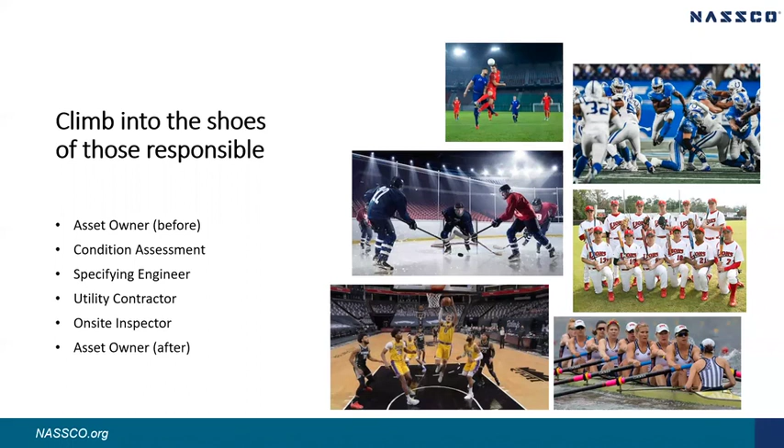And to tell this condensed story, we elected to present it in two one-hour presentations, today and tomorrow at the same time. In sequential order, today we will hear from the owner, then the condition assessment engineer, and then the specifying engineer. That's just half the story, followed by tomorrow's utility contractor, on-site inspection, and owner's beliefs on winning a manhole rehab program.

Before I introduce our asset owner, I'd like to engage first in the very first poll question, which is an opportunity for us to be interactive with each other. And the first poll question, please present. It takes a moment sometimes for these to appear. First poll question: in your community, who is responsible for initiating manhole rehab projects? Single answer, please, your best answer.

Sheila probably has a view of how these are compiling, and this first poll question is a tough one. It may be multiple choices on there. Sheila, do you have any responses to share? They're still calculating, Don, still getting a few coming in, so we'll just give it another second. Okay. You got it. We have three poll questions planned for each day. They're kind of fun.

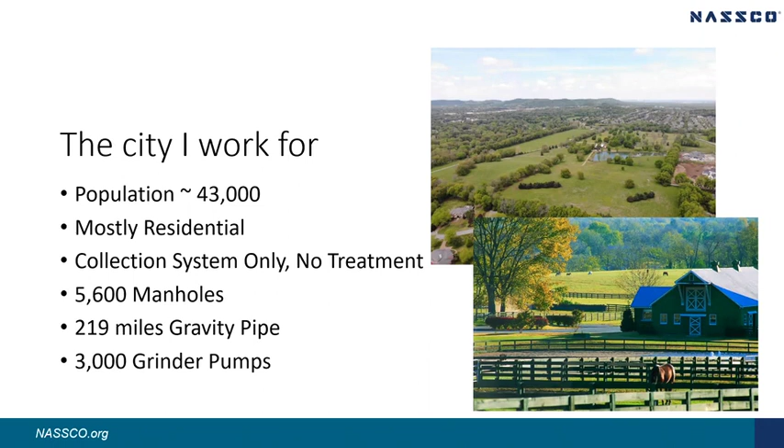And how that relates to what we're talking about today and tomorrow, and how we had to take that into consideration through our manhole rehabilitation program, is those can produce high levels of hydrogen sulfide, which, as we all know, can attack your concrete substrates and your cast iron castings.

So to walk you through Brentwood and what we've had to experience and what I've had to experience as an owner: in the mid to late 90s, Brentwood was doing some rehab efforts. They knew they had some issues. It was all kind of self-imposed. They had purchased some equipment, did some CCTV inspections of pipelines, smoke testing. The main rehab method was clay and concrete joint repairs and grout injections.

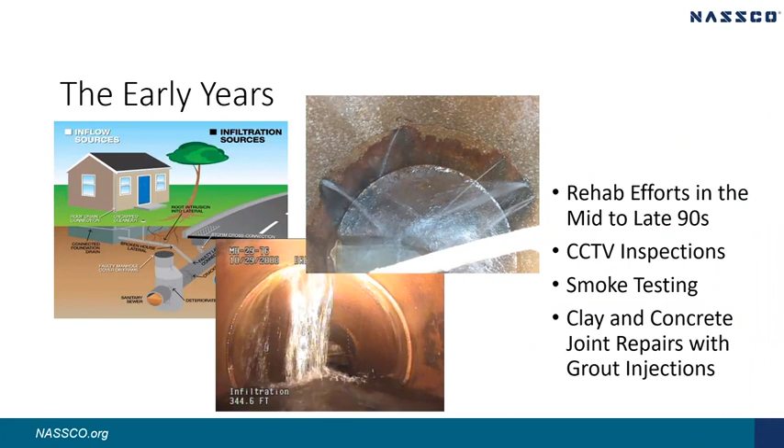And what you don't see on this slide is any mention of manhole rehabilitation. It just didn't occur. They would make repairs as needed to manholes for almost a complete failure or something, but there was no manhole-specific inspection and no manhole rehab at that time.

So that led us into 2006, which is when the red flags got waved around us. Our I&I issues had reached a point that checking a box off for our internal rehab program wasn't enough. And so unfortunately, the Tennessee Department of Environment and Conservation, TDEC, stepped in and we were issued an agreed order. As part of that, we went into a sewer moratorium, which meant no new connections to our collection system. And as any growing city, especially in the mid 2000s, that was a major concern.

And just to give you a point of reference, in 2004, what triggered some of this and caught the attention of the regulatory agencies was we had 30 reported sanitary sewer overflow events.

So after we had received the order, the next step as an owner was to try and come up with a plan of action. And so a CAP, corrective action plan, and engineering reports were created. It was split up into two phases. Obviously, a sewer rehab program was generated, and as part of that program, manhole rehabilitation was an important aspect. EQ tanks were also identified in those early studies. And the timeline presented to the regulatory agency, TDEC, was to be done with our initial efforts in 2015. Going back to our budget requirements, it was estimated at $30 million at that time.

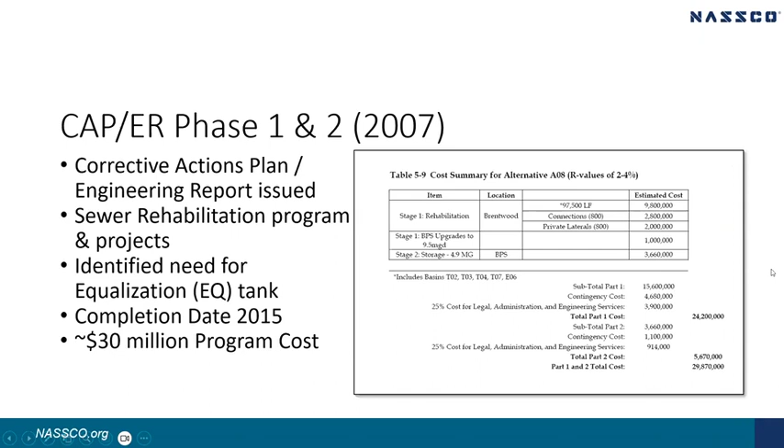Brentwood, our department, was in a good position financially, and how we handled the budget and how that dictated how we rolled out our manhole rehabilitation construction project was that money was funded through bonds, so we were not dependent on any outside funding sources.

So in 2008, we began our sewer rehab program, if you will, which included manhole rehabilitation. I'm going to walk through some of those steps and some takeaways from that. Again, 2008 to the end of 2014, bringing us to 2015, was our rehab program. I'm going to talk in some more detail here about flow monitoring with I&I analysis and studies, and then also some program management and construction oversight.

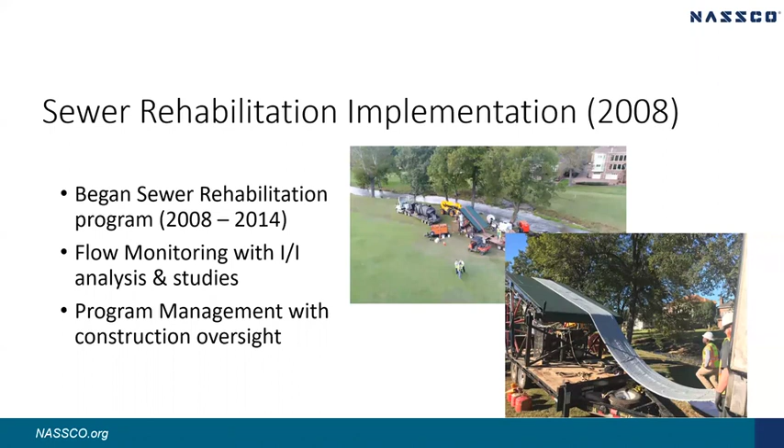So one thing I do want to mention is that as we got into our program, we were fortunate enough that the city decided early on to create a GIS department in 2006, as we were getting into our order and our program. And I would imagine today most communities, municipalities, utility districts have a GIS system of some sort and have GPS'd their assets, particularly as it relates to manhole rehabilitation. This has been a critical component of our program and of managing our manhole rehabilitation projects.

Obviously, going out, locating them, finding them, if they're buried, knowing where they are, using old as-builts to kind of determine when they were built, type of materials that they were created from. It's a huge thing. But more importantly, as you jump 10, 15 years later, after you've gone through a manhole rehabilitation program, it's so critical to be able to store all that data that you collect during that process.

And one of the things today that we're fortunate of is I can click on a manhole in our GIS system and I can see when it was rehabbed, who rehabbed it, what contractor it was, what products they used, and some additional information. So that's just good as you continue on with your program, as you expand your program, and then maybe as you revisit areas that you've completed in years down the road, being able to map that out and manage all that data.

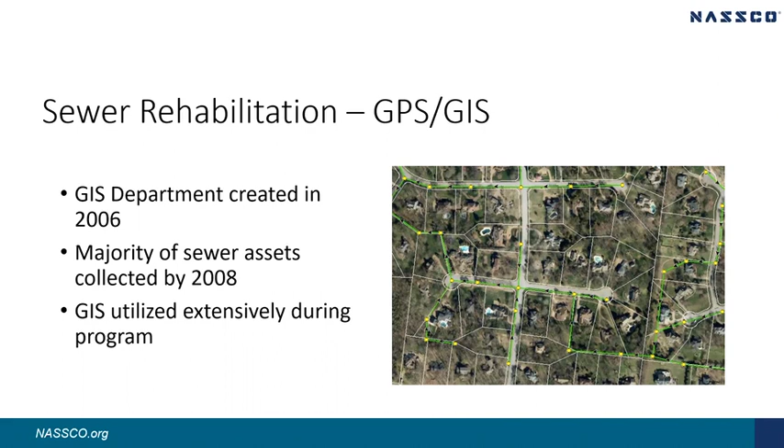So I just want to briefly mention flow monitoring. While it's not directly manhole rehabilitation related, it is, in my opinion, a key component of rating or showing your success for a manhole rehabilitation project or program. We began flow monitoring with 6 permanent meter sites back in 2006. We still have those in the ground today. That's kind of what I like to say: it gives us a pulse of our system and how it's reacting annually.

And also over the years, we've done temporary metering up to 50 sites throughout the city, breaking it down into sub-meter basins. And this has been critical. It's important to have a baseline of what you're trying to achieve, whether it's an overall sewer rehab program, but then also manhole rehabilitation projects. Have that baseline, look to see how well you've done. Are you spending your money wisely? Is that manhole project that you did in that basin, did it achieve what you wanted to? And then down the road, 10, 15 years, those products that you used, are they holding up?

So it also helps with regulatory compliance. We were able to use flow monitoring analysis throughout our rehab to be able to get out of a moratorium, or I guess a moratorium relief. And so that's another benefit of flow monitoring.

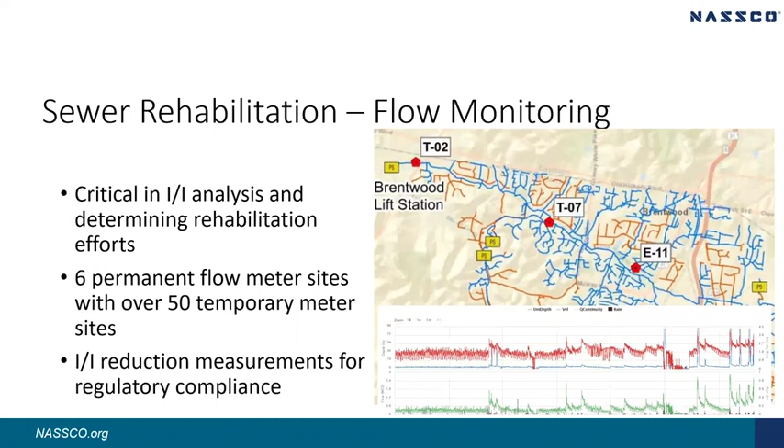So sewer rehab and kind of our construction methods for our project. We kind of went about it with the find and fix method, if you will. With the fact that we were using money in-house, we were able to hire on contractors. We sent them out to sub-basins. They did CCTV inspection, manhole inspections. And then from that, they gave it to our engineers. Our engineers in return gave those contractors task orders to complete the work so that we can streamline it and get our rehabilitation efforts in a faster method.

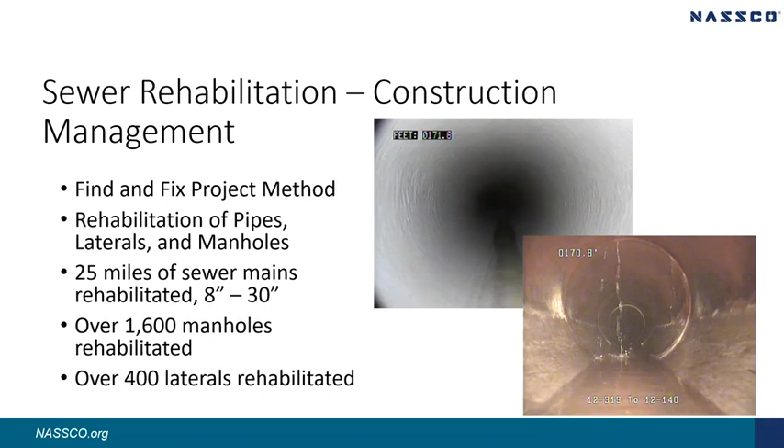So as we neared the end of our initial program, we decided to continue on and basically created a phase 3 program and do some more rehab. We saw the effectiveness that manhole rehab was having on our system. The leaks that we found in our manholes were great, and by reducing that, we were seeing a benefit in our reduction in flows. And so we decided to continue on through 2019 with our rehab program. And at that point, we had spent almost 24 million, and 20% of our sewer system had been rehabbed.

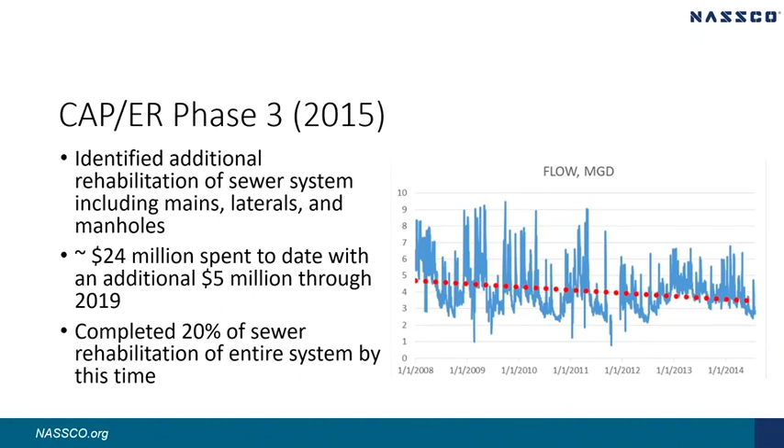I want to briefly mention too, in 2015, a master plan was done in conjunction with that CAP-ER. And one of the benefits that came out of that I just want to talk about briefly was the hydraulic model. And this kind of goes hand in hand with the flow monitoring. A lot of times you're talking manhole rehab and the money you spent for that. But again, it's also good to acknowledge and look into spending some money on other sources such as flow monitoring and hydraulic model to be able to help you recognize areas that maybe you need to go into and look at rehab and doing some manhole rehab.

It also helps with regulatory agencies and showing them your results of all the work that you're doing and the money you're spending as it relates to manhole rehab and then sewer rehab in general. But again, a hydraulic model, we went through this process and it continues to serve as a great tool both during construction, after construction, and as we continue to project and look into future rehab efforts.

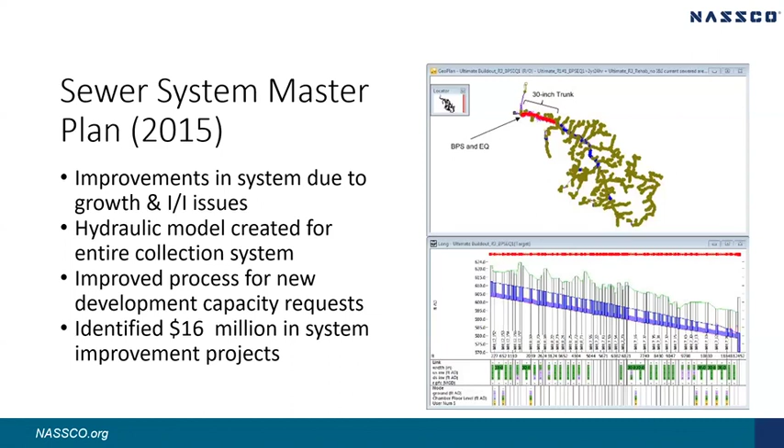And so in 2019, we kind of came to the end of our phase 3. And once again, we worked with our regulatory agency, TDEC, and we asked for another extension to continue to work at our I&I removal. We had some great results, and I'll touch on the results of everything at the end of today's program. But it was successful, so we decided to continue on with rehab through 2022. Part of that and what was in the initial plan was to build an EQ tank, and that is online as of December of 2022.

But more importantly, and as it relates to this webinar, our sewer rehabilitation program is planned to continue through 2027, which we will allocate through continued funding. Here to date, we've just finished a number of smoke testing. We've kind of gone back into smoke testing through manholes, but then also we just finished a 200+ manhole inspection with an outside contractor along our main trunk line that runs along the river. And our engineers are currently collecting that data, going through it, and we plan to put out a pretty significant project for manhole rehabilitation here in the next year.

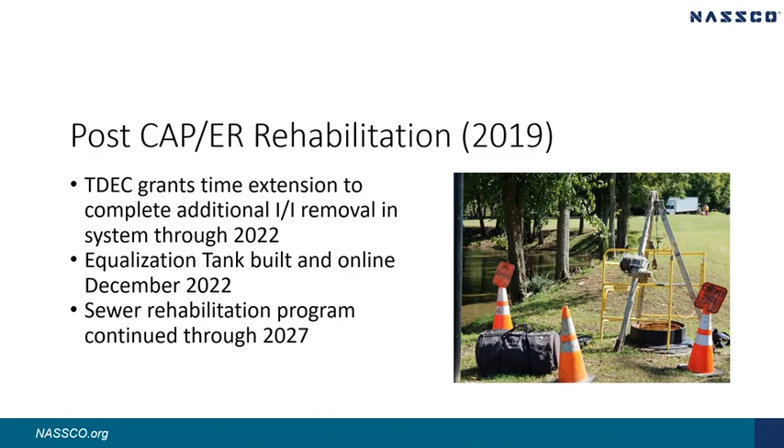So kind of in summary, as an owner in controlling our assets and manhole rehabilitation, budget concerns always come into play. We'll talk about inspections and providing that oversight during construction, manhole rehab, and how important that is, and being able to budget for that and fund those services. Obviously, regulatory guidance and enforcement is an important component for an owner having to work through their timelines and the guidance and regulations that they want to see from a manhole rehab or sewer rehab program.

GIS asset management is a critical component for particularly manhole rehab, in my opinion, and being able to manage that. You can get inundated very quickly as you get into a project or program with manholes and what you've done, what you haven't done, who did it and when they did it and all that. So again, a critical component and worth taking the time to get that right on the front end.

Flow monitoring, again, in my opinion, is a great tool to be able to identify areas to spend your money where you might get your best bang for your buck in manhole rehab, and then also being able to show those results that what you're doing is working, and maybe it's not. Maybe you need to reassess your efforts and your methods. Obviously, construction methods will come into play with some of the other presentations. But the main goal for everybody here on today's webinar is I think we're all in it to see the reduction of I&I and ultimately elimination of sanitary sewer overflows for our communities, municipalities, and utility districts throughout the nation.

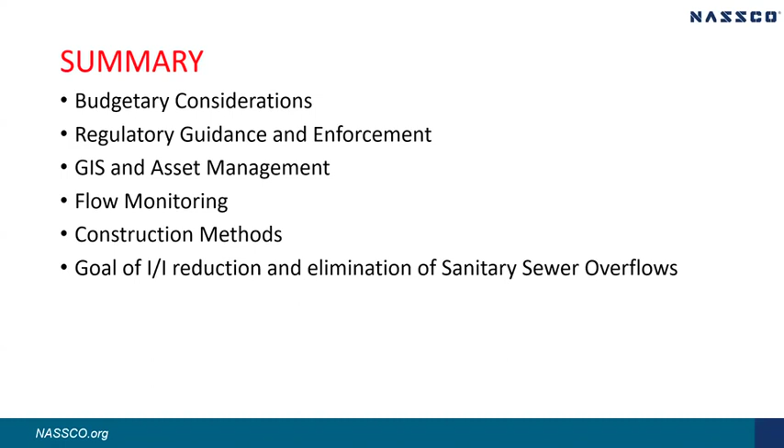And before we move on to our next engineer on condition assessment, the next poll question is a simple true or false answer. The question is, level 1 condition assessment does not require man entry into the structure and can be conducted from the surface opening. True or false? Level 1 condition assessment does not require man entry into the structure and can be conducted from the surface opening.

These questions are always interesting to me. And it looks like we got a response coming. Yes. It appears the majority of you know a bit about condition assessment on manholes. The answer is true. Level 1 assessment can and is conducted with a top-down view from the surface. Thank you.

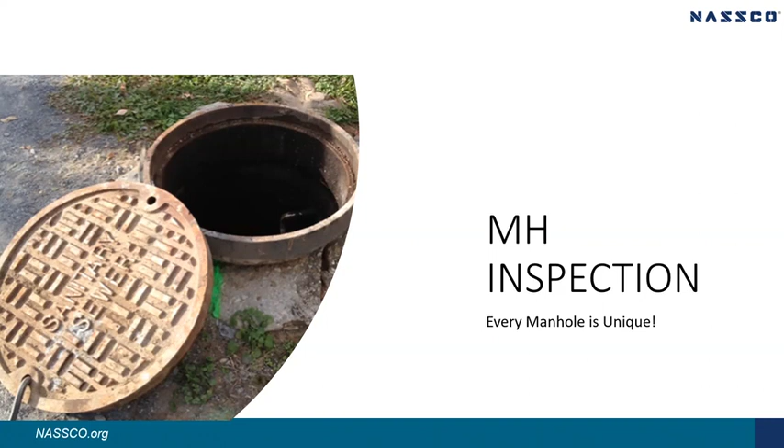And I want to convince you that both are important and that manholes in particular are unique and they are actually rather complicated. So what makes a manhole unique? Well, think about it. You have a hole there that you want to allow people to come into to inspect the manhole and do maintenance on the sewers, but you also want to keep people out. You want to allow cameras and cleaning equipment to get in there, but you want to keep runoff out of the manhole.

You have a vertical situation. We're going to talk later about the manhole being considered a vertical pipe that starts at the surface, so it gets runoff coming into it from inflow, from rainfall directly. But if it gets deep enough, it gets below the groundwater table and you've got infiltration coming in. It's also subject to hydrogen sulfide corrosion. So there are a lot of things it needs to maintain itself through, but also allow. So it is a very unique structure.

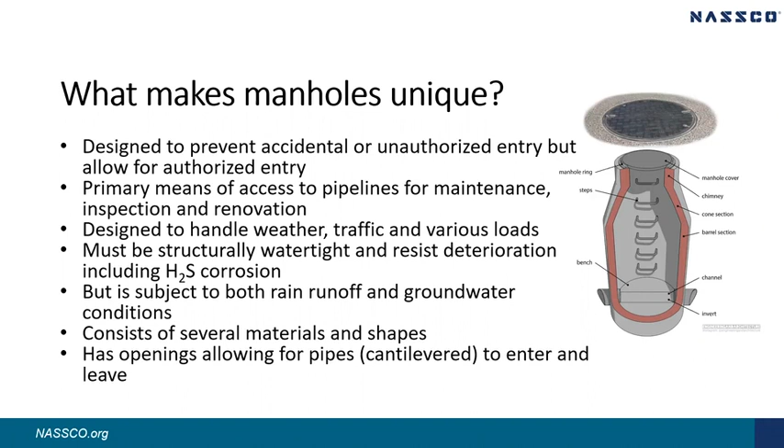Don mentioned that I was actually on the board of directors of the Buried Asset Management Institute. Some of you know Tom Iseley and his group. That group is really dedicated to the asset management side of things, so I have that hat I frequently put on. I don't know if BAMI actually developed these, but I know they use these questions. There are 8 basic questions of asset management that are going to be associated with manhole condition assessment.

The first 3 questions answer these. What do we have? And don't necessarily think that you know what you have. I've seen many times that a utility is surprised, when a complete condition assessment is done, at how many manholes they actually have in their system. And then where are these manholes located? You're going to get that information also from condition assessment. And more pertinent to today's discussion, we're going to find out what the condition of each manhole is.

You're going to be able to determine through a level 1 or a level 2 inspection what the condition of the manhole is. So condition assessment gets those first 3 questions answered, but you still have more information you can glean once you've done a condition assessment and located the manholes. From the condition assessment, you can determine what the manhole is worth, based upon its original construction, what type of construction, how long it's been in the ground, how much useful life it has, and what its condition is.

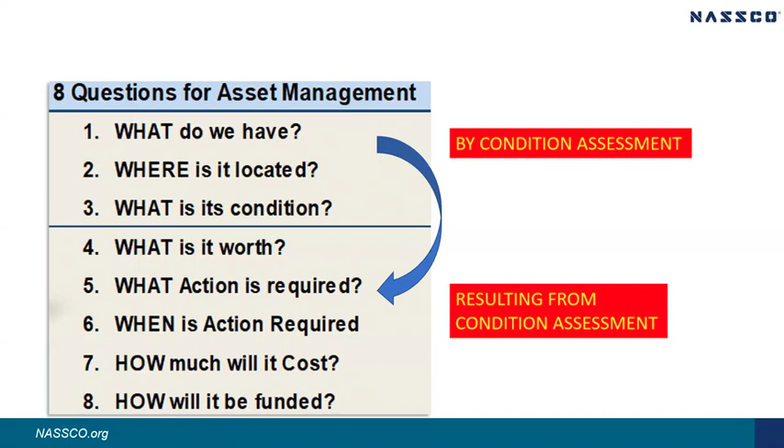Then you can determine what action is required, perhaps maintenance, perhaps a rehabilitation, perhaps a replacement, for each of those manholes you've inspected. Then through risk management you can establish a priority, and that priority and your budget will establish when the action is going to be required. We're going to talk about how we set some policy for doing that. And then what's it going to cost to get that manhole back in the condition you want to maintain it in? And finally, once you know your cost and your action plan, how it's going to be funded and what funding sources to look for.

We've already hinted at this, but there are two basic types of manhole inspection. This was in the poll question. As most of you understood, a level 1 inspection is what the old timers used to call an above ground physical inspection. You'd have a pad, maybe make a few measurements, look into that manhole and determine: is the frame in good condition? Is the frame seal leaking? Is the chimney in good condition, the cone and the wall? And you do all of that from above ground. You can get quite a few of these done in a day, maybe 40 or 50.

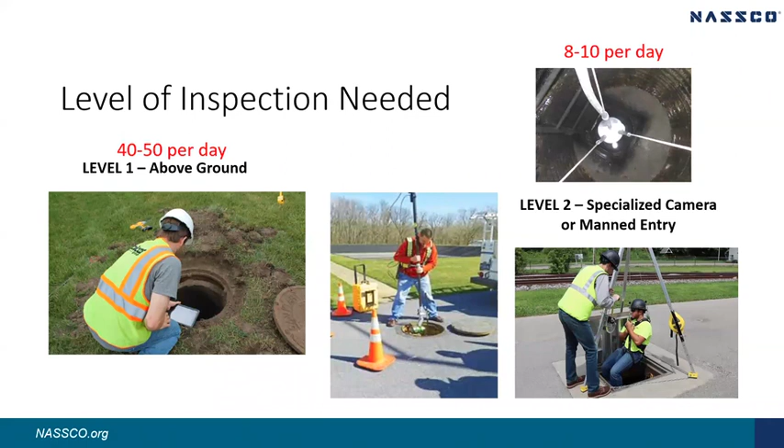Now, contrasting with that is the below ground physical inspection, or what MACP calls a level 2 inspection, where either a human with proper safety equipment, as you see here, descends into the manhole to make measurements and visually look at every aspect of that manhole, or you can use specialized cameras that go into the manhole, still from above ground. With this, you can get 8 to 10 manholes done per day.

Wanted to show this real briefly, what the MACP inspection forms look like. On the right here, you have a header form where you get demographic data, who you are, where you are, what you're doing, why you're there, what the manhole is, what the materials are, and so forth about that manhole for a level 1 or 2 inspection.

Then you move to the manhole inspection form. That's the large form to your left, where you actually look at each component separately, and depending upon whether it's a level 1 or level 2, you gather quite a bit of information. And then for a level 2, over here to the bottom right, you would actually complete a manhole inspection form, looking at the manhole as if it is a vertical pipe. For those of you that are familiar with the PACP, this form is almost identical to the PACP form.

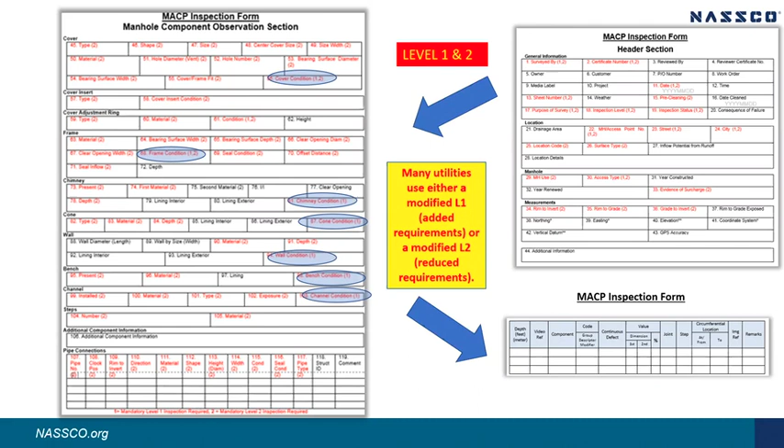But the main point I wanted to make in showing you this is, if you look at that form on the left, all of the red there that's not circled, and even some of it that is circled with the blue circles, is what is required for a level 2 inspection. A level 1 inspection really only records the information that is in the blue circles. So you've got the choice there of a level 1 or level 2, or a modified level 1 or 2. And many utilities will opt for either a modified level 1 with added requirements, or a modified level 2 with reduced requirements.

These pictures kind of illustrate the point you're looking for in a level 1 manhole inspection. Every angle, joint, or change of material should be a point of particular emphasis or interest, and these are what is done in a level 1. You look specifically at the cover, and where the cover meets the frame at the bearing surface, is that seated well? So you'll make a yes, no decision. And then you'll look at the frame seal between the frame and the chimney. Is that leaking or not?

Anytime there's a change of material, like you frequently have between the frame and the chimney, you might have a metal frame and a brick chimney, that's a point where it's very difficult to seal, and is likely for I&I to come in. Also, where there are angles, like where the chimney branches out into the cone, into the wall, that's where it is. And then where pipes come into the wall are also a point of particular interest.

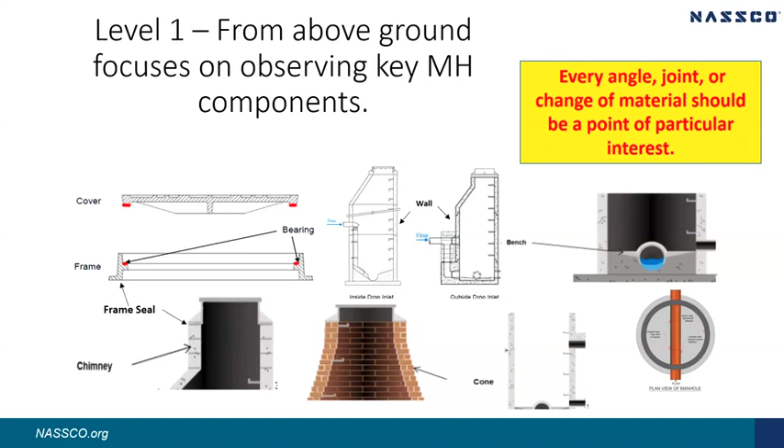Now, for a level 2, you do get into a lot more detail. In a level 2 manhole inspection, at least in the MACP method, the manhole is going to be considered a vertical pipe, but with various components. So we're going to start at the rim and measure down to where the defects are. And then we're going to look at the outgoing pipe being at 6 o'clock, and we're going to look at the clock position to locate where defects are in the manhole wall. So you could say a manhole has a crack in the wall, 10 foot below the rim at 5 o'clock. That would be very near the outgoing pipe of 6 o'clock.

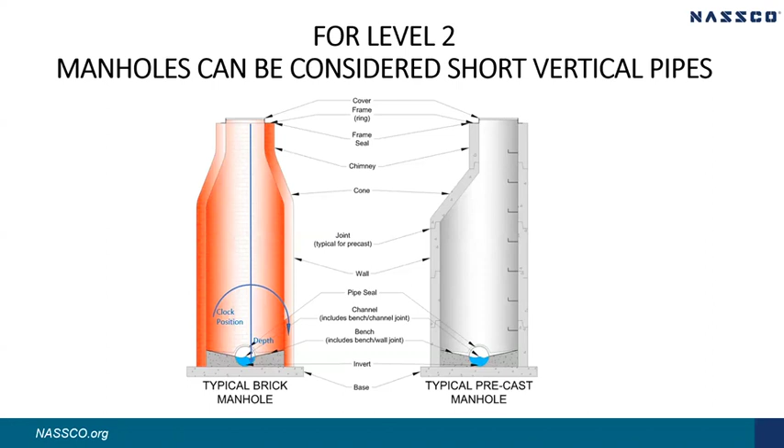Here's another view of the invert of a manhole. And like I said, we're going to look at the outgoing pipe and arbitrarily call that 6 o'clock, regardless of where it is in your view of the manhole. In this case, the 6 o'clock is at the top of the manhole and the 12 o'clock is at the bottom. And then you see 10 o'clock and 3 o'clock. But we in the MACP, and it could have been done various ways, very arbitrarily established that the outgoing pipe is the 6 o'clock position. And then you move around that in a clockwise way to determine where the clock positions in the manhole are.

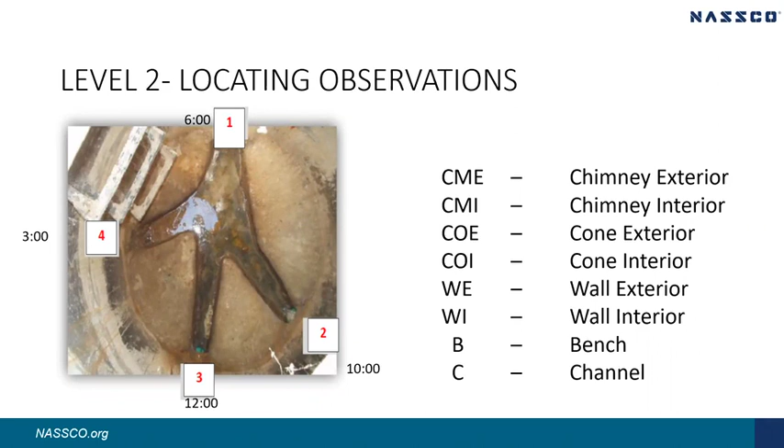So you have the chimney exterior, the chimney interior, the cone exterior, the cone interior, the wall exterior and the wall interior, because of course they can be above ground. And then you have the bench and the channel.

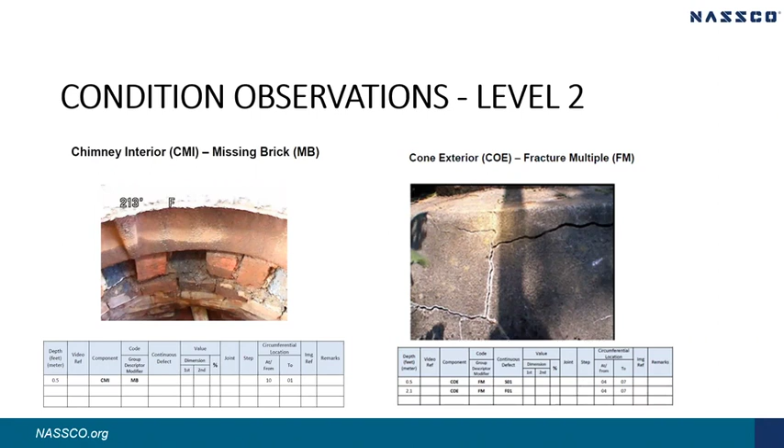The image on the right illustrates that you also need to look at, if a manhole's above grade, the outside of the manhole. In this case, we have a continuous defect of a multiple fracture, a fracture multiple FM, running from 0.5 feet to 2.1 feet below the rim from 4 o'clock to 7 o'clock with reference to the outgoing pipe at 6.

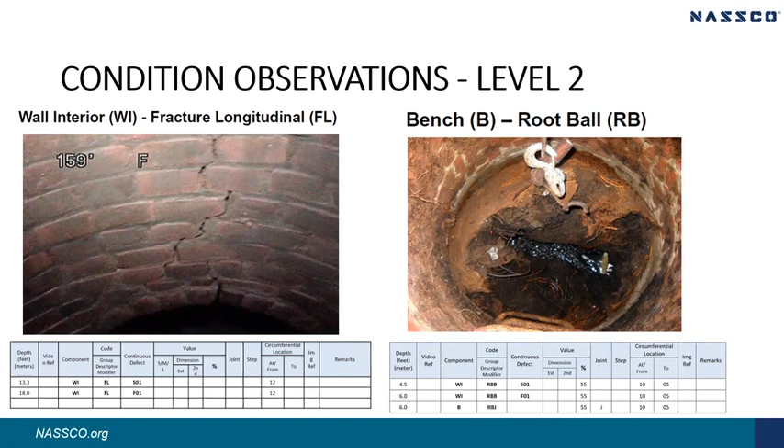Here we have two on the inside of a manhole to illustrate that manholes, like pipes, can have fractures. In this case, this fracture is at 12 o'clock, so the outgoing pipe is behind you, and it runs from 13.3 feet to 18 feet, and then you have a root ball in a manhole. Just to show that the same things are occurring in a manhole or in a pipe, and we're recording the information in much the same way.

Then we want to establish the risk. The risk is going to be the formula likelihood of failure times the consequence of failure. We establish the likelihood of failure by giving a 1 through 5 numerical rating to every defect we see in that manhole, with 1 being a very minor defect, say a few roots coming in, to 5 being the walls are collapsing in the manhole. And then, how bad is it going to be if that manhole fails? We establish a consequence of failure.

NASSCO recommends that we use the triple bottom line approach, where we don't just look at the dollars of cost into a manhole, but also what are the social costs, what are the environmental costs, and we combine that together to also get a 1 through 5 rating. And as we multiply those two together, you could have a rating for that manhole between 0, if there are no problems, all the way up to 25 if you have a likelihood of failure of 5, a collapsing manhole that's in the middle of a busy street or something like that. So that's how you establish the risk that is used to establish priorities.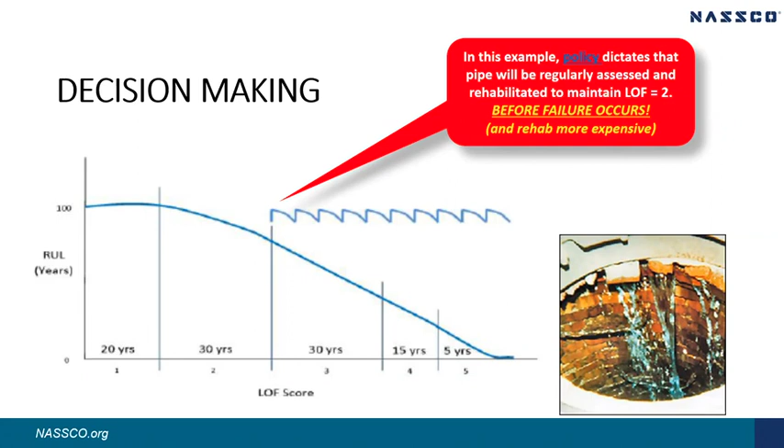In this case, a utility has established a policy at about 50 years. They estimate that manhole is going to be at a likelihood of failure score of 2, or moving into the 3 category. That is when you do the rehabilitation. And you'd love to do this at this stage before you actually start getting these manhole inspections done. So you've already made your decision through policy, and you've codified when you're going to be doing various rehabilitations.

And then as Drew pointed out, the value of GIS. Through this process, you can get all sorts of information. These tables represent each of those kinds of information that you can get. And you're going to be able to establish that into a map. And you can look at the map to see the relation of these rehabs to each other, how they relate to the pipes.

For example, if you're doing a pipe, and Drew made this point, you're going to want to rehabilitate the manholes too, maybe even if they're not quite ready for rehabilitation yet, just because you're out there and you want them to be fixed as well as the pipes. And you have the map that you can use now to locate and reference these, instead of in the old days having to go to a shelf and pull hard copies off and look for your problems and unroll maps.

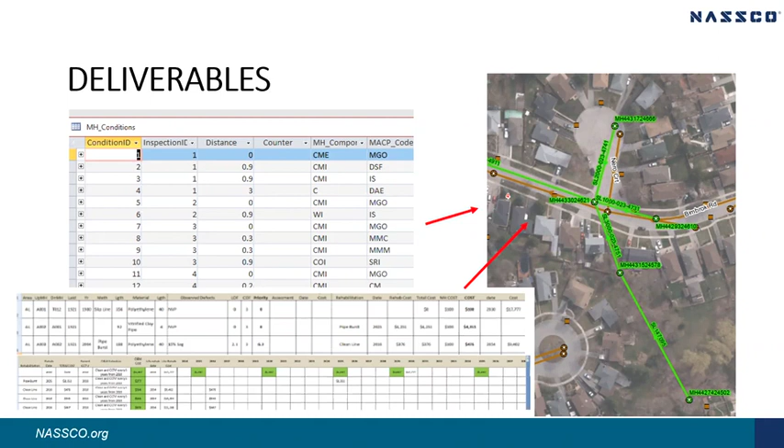So in summary, manholes are unique structures that require significant assessment skills. Level 1 inspections can be used when only basic information is needed. Level 2 inspections are needed when more precise details and locations are needed. This is typically when a rehabilitation or modeling is driving the process. You may need better location information, better depth and capacity information regarding the manholes. So you need the better measurements that a level 2 gives.

The data-based priorities should be used to establish and codify policy rather than political decisions and so forth. And then all deliverables should include a link to a GIS map. Thank you very much.

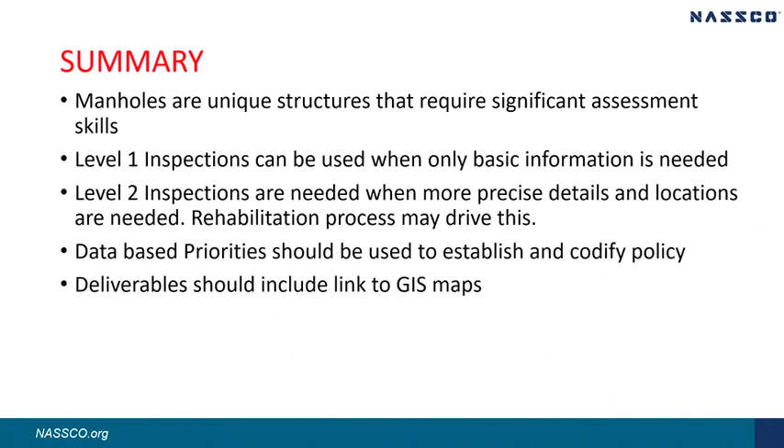Well done, Jim Harris. Well done. Obviously, you know your craft, and thanks for sharing.

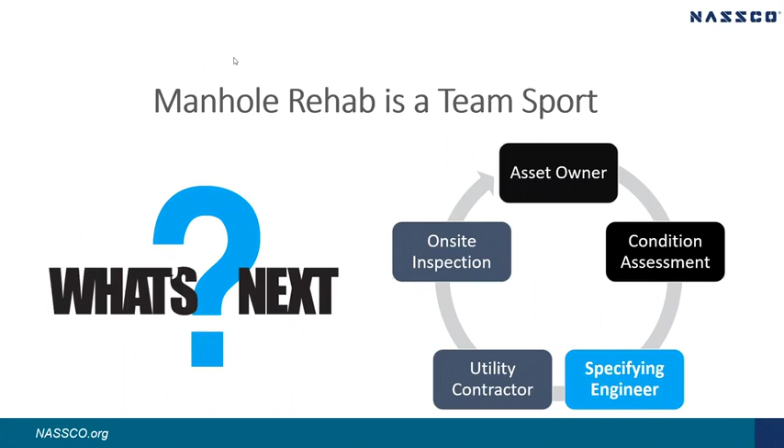Before advancing to our next expert engineer, poll question number 3 is next. There we go. The poll question reads as follows: When planning a manhole rehab project and developing a specification, do you have your own, use one from an engineer, use the NASSCO specification, or let the contractor wing it?

When planning a manhole rehab project and developing a specification, do you have your own, use one from an engineer, use the NASSCO specification, or let the contractor wing it? Ideally 30 seconds.

And as you can share, please do. I was hoping number 4 wouldn't get many votes, and it appears that's the case. Using the NASSCO spec, thank you very much. Awesome. That's a great answer. I didn't know how it was going to come about, but you did good. Thank you very much.

Thank you, Don. Thanks, everybody. I am going to be talking about specifications in the Manhole Rehab program. Drew talked about the owner's challenge of juggling priorities. Jim talked about inspections and finding all sorts of cool stuff. And here I am, the last presentation of the day, and I'm hopefully not going to put you all to sleep, but it's not a super exciting topic. But good specs are critical to the success of your rehab program.

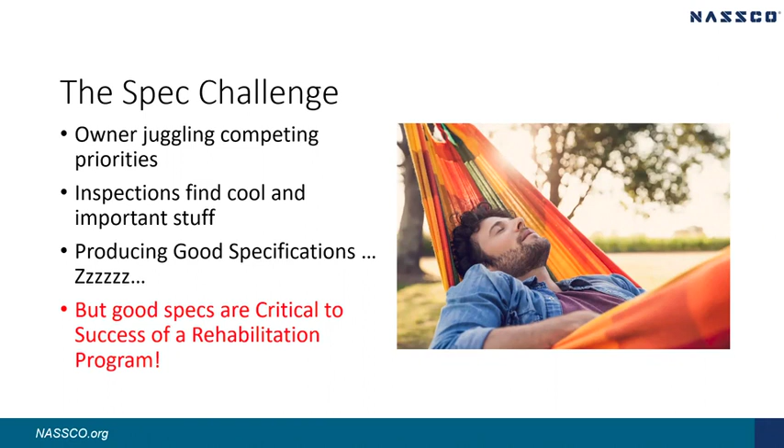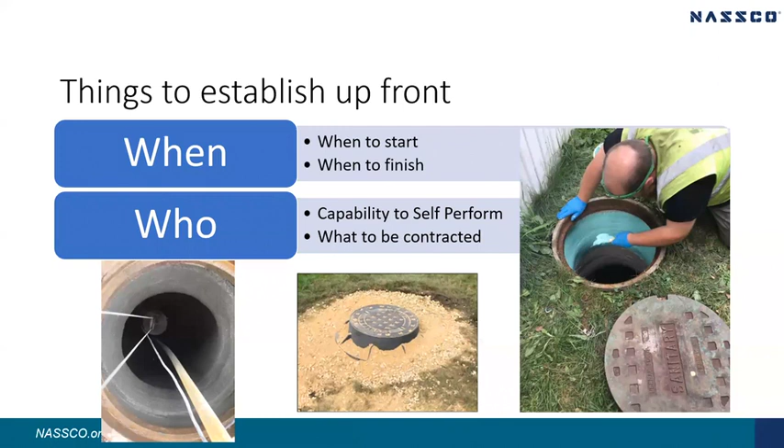So there's some things you need to establish up front. When are you going to do it? There's a lot of things to consider: what's your fiscal year, weather, school schedules, a lot of those types of things. Who's going to do the work? A lot of places have capability to self-perform some of the manhole rehabilitation work, or are you going to contract everything out?

Where are you going to do the rehab? Are you going to do rehab by proximity or location, one basin at a time, or by type? We're going to do all our frame, chimney, cover rehabilitation together, or all lining or whatever. And then how much? Drew mentioned this, that is what constrains the program. How much money is there? Is it going to be multiple programs? What's going to go first? How are you going to get all that work done?

So Jim talked about inspections, and those inspection findings are really important to driving a rehab program. You look at those inspection findings and available technologies and approaches that are out there. Those are always changing, always updating. Those get married into your rehab recommendations, that goes through the budget funnel, and that creates your rehab program. Specs are how that program gets communicated to the contractor.

So there's a lot of parts to your spec book. The front end, there's a bid package, contract docs, general conditions. I'm not going to talk about any of those today because we don't have time. We don't want to be here forever. We're going to talk specifically about the technical specifications part of the spec book.

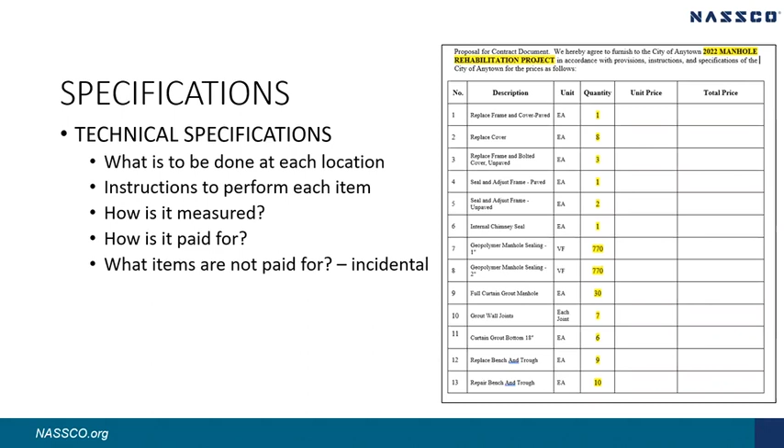So the technical specifications are where it's defined what is to be done at each location, and the details of what is to be done. How are you going to measure what gets done, and then how are you going to pay for it? And also, we'll talk more about this later, what items are not paid for or are included with other items. And on the right there, that's a bid tab. Every one of those numbered items on your bid tab needs to correspond to a numbered item in your technical spec.

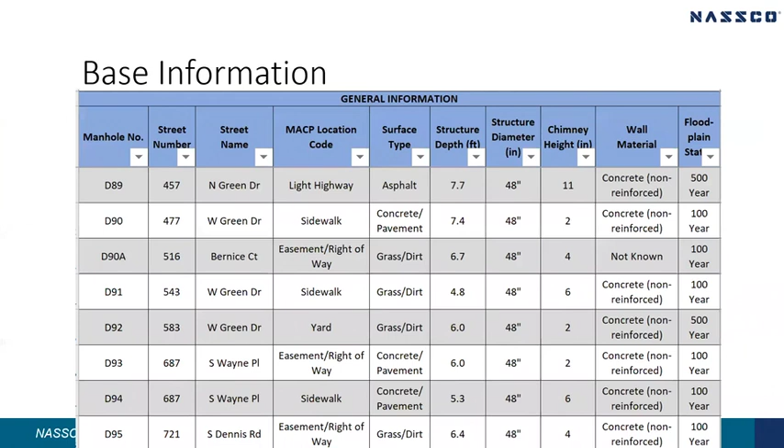So as Jim mentioned, much of the information comes from the inspection: location code, surface types, structure depth, wall material, all of that comes from an MACP inspection of a manhole. Some things come from your GIS. One of those things that is very important when putting together a manhole rehabilitation program is floodplain status, because that can drive the type of cover that you're going to put on a structure. So you end up putting together a spreadsheet that lists the structure ID and what you're going to do at each one of those structures.

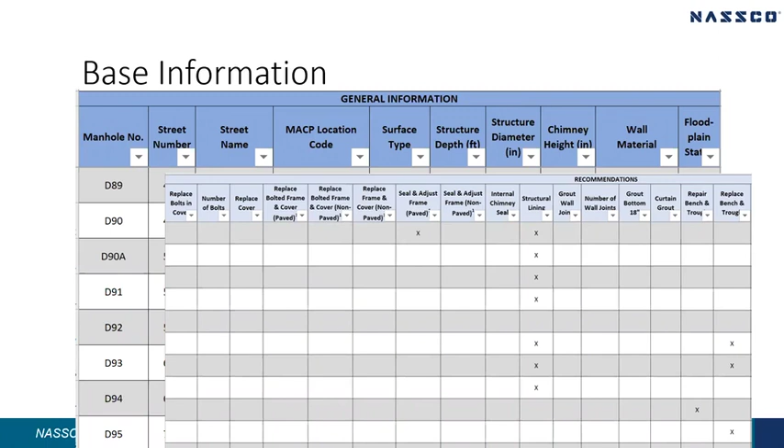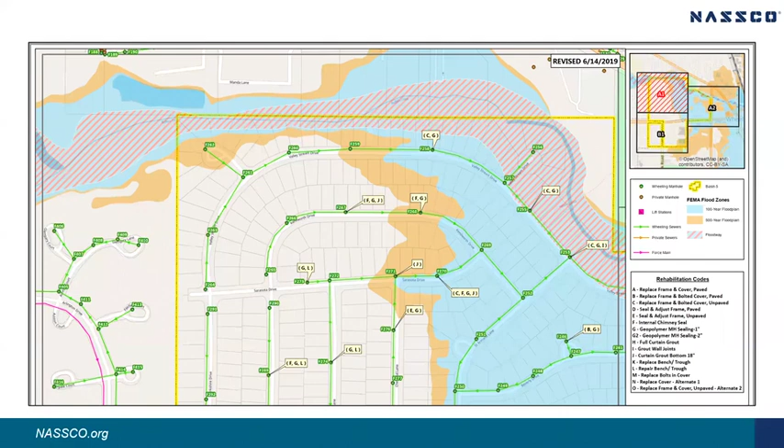And then lower manhole repairs, which is basically from the chimney down, various types of lining for structural or chemical protection, grouting, multiple different types of grouting that you might want to do in the manhole. And then of course, repair or rehabilitation of the bench and trough area.

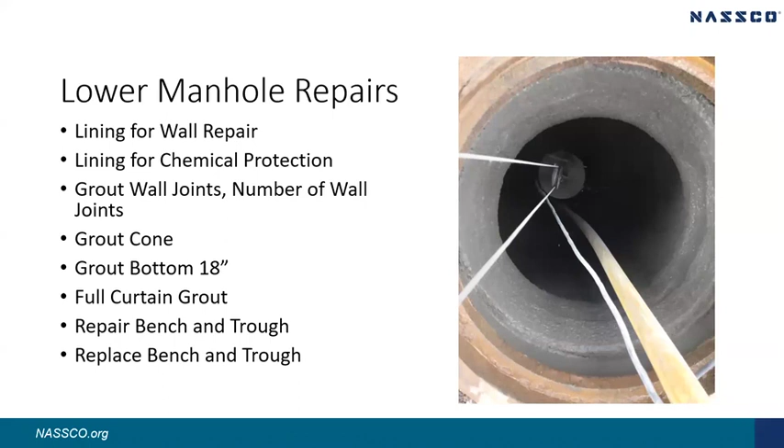And the other types of manhole repairs, these are sort of less commonly specified, but installing a barrel section. If you have an extra long chimney, you might need to shorten that up and install another 48-inch or 56-inch, whatever your diameter is, barrel section. Partial reconstruction, which is from the cone all the way up. Occasionally, you just have to replace a manhole. You can't rehabilitate it. Cleaning, plugging pipes that shouldn't be in the manhole are also things that could be in your rehab program.

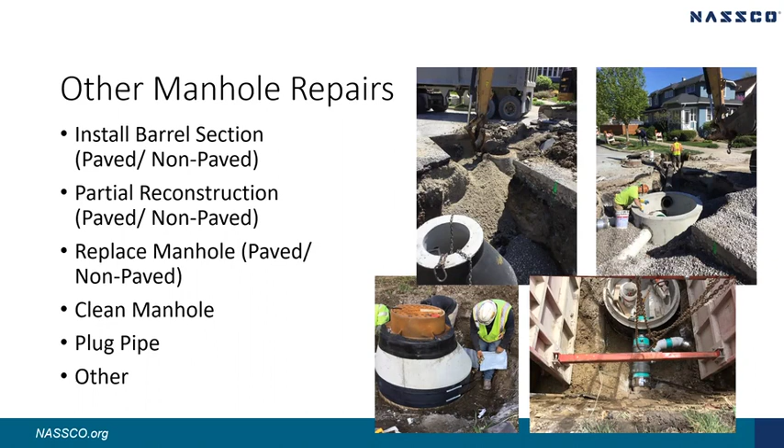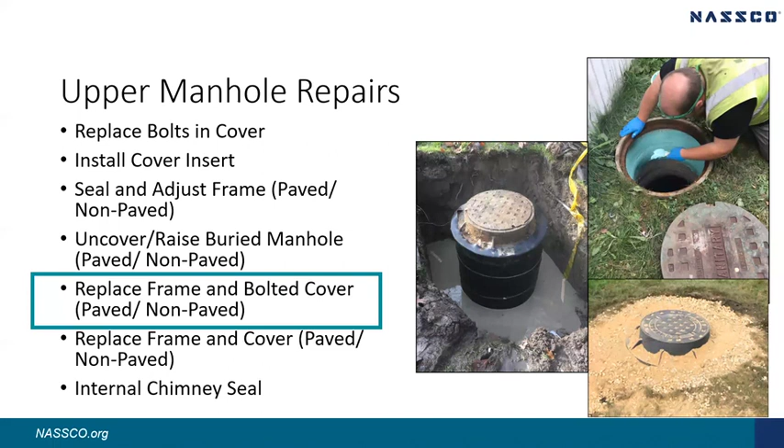So restoration, what I just mentioned before, that's incidental. You want to be clear about defining what is incidental. And that means it doesn't get a separate pay item. Typically, things like mobilization, traffic control, bypass pumping, and restoration are incidental for manhole rehab projects. These can have a separate bid item if it's an unusual situation, or if you're replacing a lot of pipe, then it'll probably be a separate bid item. But for manholes, typically these are all considered incidental.

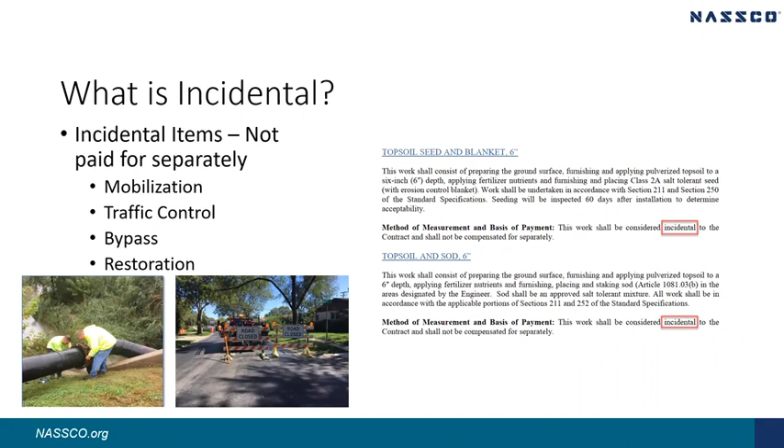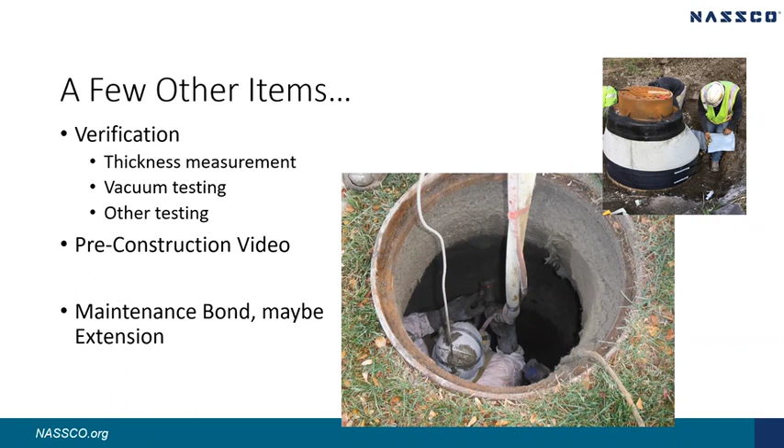A few other things, and we'll touch more on this tomorrow, but you want to define how thick do coatings need to be? What is it you need to measure? What kind of testing needs to be done? We always include a pre-construction video. You want to know what was there before the contractor came in, and that's really for the owner's protection, the contractor's protection, and the resident's protection. And then maintenance bonds, typically they're a year. You may, in certain circumstances, want an extension. That should be a separate bid item. So basically, good specs communicate what's to be done, where it's to be done, when it's to be done, and how it's to be done.

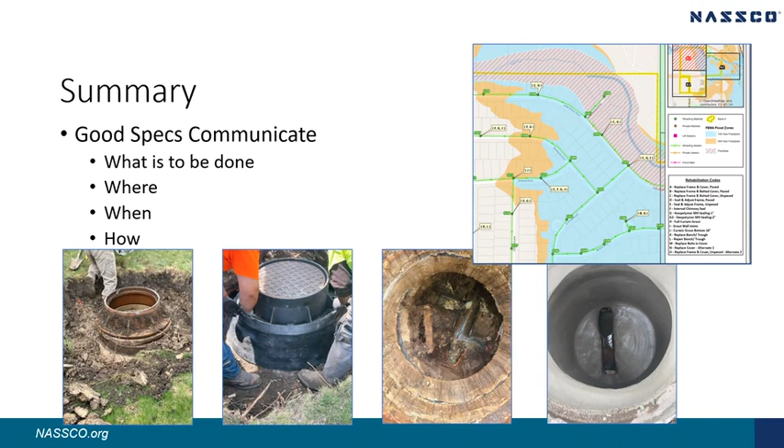Don, are you talking? You're exactly right. That's the second time in my life I've done that. Carol, you never disappoint. Thank you.